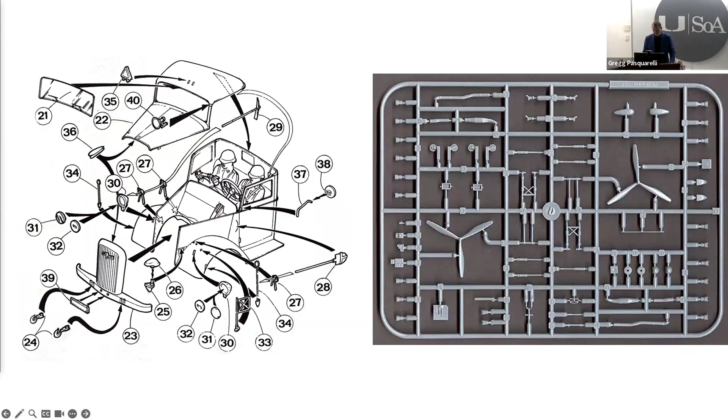And so from the very beginning of our office, we really started to look outside of architecture, mostly to aerospace and to the automotive industry, to think about the way that those drawings are made, those models are made, those pieces are put together and then assembled somewhere in the world. Maybe they're made all over the world and then brought together at one place. And by mastering that, we were able to push the limits of what you could do architecturally and make different kinds of translations and extract every dollar out to make better citizens of the buildings and the places that we make.

And this goes all the way back to, scarily, almost 25 years ago when we won PS1's Young Architects program, and created a kind of urban beach, which was a sculpture. And this was the construction document set, which was a series of large scale templated drawings where you just lined the wood up based on a color coded sequence and put it together in order to create this object that then sat in the courtyard of PS1, which is part of the Museum of Modern Art.

And it was the first time when we brought together this notion of structure, surface, and program into a single element, where the walls became the chairs, became the benches, became the structure, became the chambers, and created this object that was very easy to put together, and really drove this whole program for the museum.

But as we continued to do projects like that, we really got deeper into the making of things and how do we draw them. Because architects are very good at taking all of these different problems and synthesizing them into a spatial solution. And then we have to dumb it down into 2D information and give it to other people to both make the parts and to put the parts together. And that reinvention into not only 3D, but 4D and 5D is where a lot of things are lost. And so we continue to look at outside ways of transmitting this information in order to build buildings.

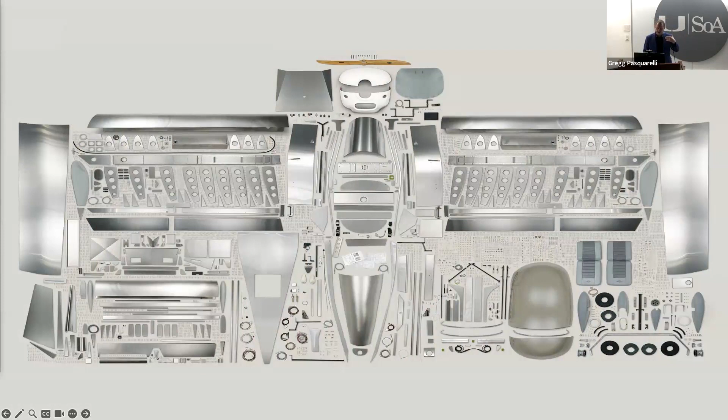And the first time we were able to do that was a small park we did out on the eastern end of Long Island in a town called Greenport. There was a folly that the mayor wanted of a camera obscura. And so we asked them if we could take that opportunity to make the first building that was completely digitally fabricated. So it was 2,200 parts, no two were alike. Every single one was fabricated with CNC equipment. It was delivered to the site and it was put together.

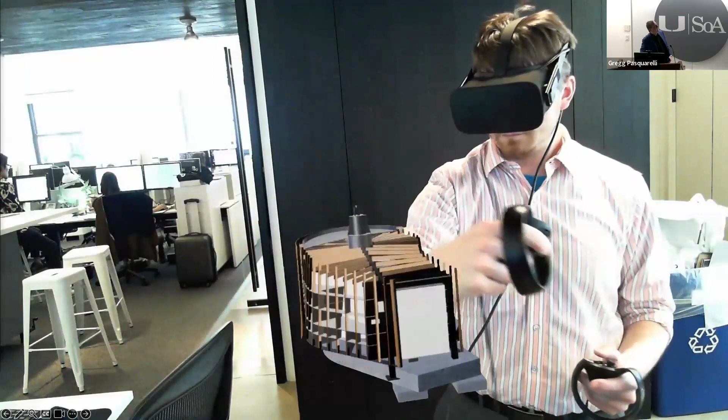And the most interesting part about that was that these were the drawings that made the building. They were either drawings that told you how to make each one of the parts, or drawings that just showed you how to put the pieces together. And this is every part that went into making the building. We were using a lot of early cutting edge technology, visualizing and thinking about how the pieces would go together. Every part was pre-numbered, pre-drilled, pre-slotted, and went to the site. And we created this little pavilion, which still stands today in this park.

And it was a really telling thing for us because we were able, at a very strict budget, to produce a piece of architecture that was able to use better materials. We were able to control where the materials came from. We could think about the supply chain, about the labor practices, and we could make everything customizable, but it was mass customizable, which was a more effective way of delivering things like that.

And very soon after that, we did our first development project. Because no one had ever used CNC equipment to make a facade before, to get a building where someone would allow us to test these ideas out, we had to joint venture with our client to become the developer ourselves, because then the client said, well, you have at least as much at risk as I do. And if you want to try these crazy ideas, you're going to get hurt if you screw it up.

And so it was by taking on that territory of risk and finance and figuring out the project that we were able to push the limits of what we could do from an architectural perspective. And so it was basically a historic building. We put a contemporary top on.

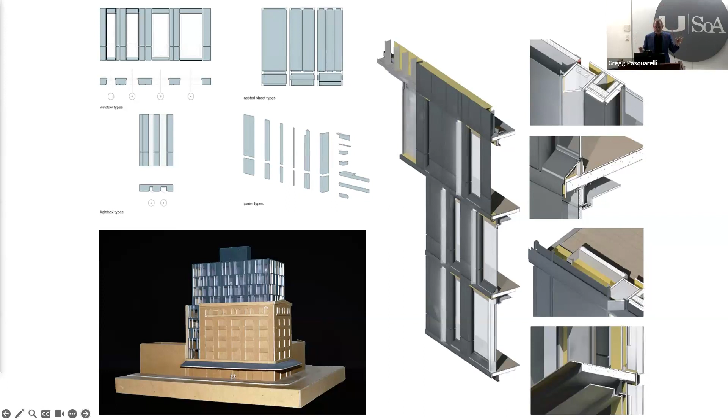We made 22 sort of protoforms of a zinc paneling system. It was 4,000 pieces in total. It went directly from a 3D model to the plasma cutters. The 4,000 parts were made. Every part came and it explained where it would be delivered. And then there was a code system that was laser cut right into the part, which explained to you where to put the piece. So the architectural detailing of the building itself was the instruction set for putting it together.

And so this was the building when it was finished. This is the first fully digitally fabricated facade in the United States. And we brought it to market and it did really well and it helped the whole neighborhood and it really pushed a lot of things that happened in this part of the city.

Now, interestingly, this was finished in 2003, and in 2006, the building across the street was taken by a small little search engine firm at the time called Google. And Larry and Sergey's offices actually looked out on this building. And so they liked the building so much that they called us one day and they had us come in, and we've been working with Google for 18 years now doing projects, but it was just because they understood what was going on from a technological standpoint that they then invited us in to begin to think about how to plan and work and do work on their campus.

That said, this was a 50,000 square foot building, which is not terribly big, although we really learned a tremendous amount about it. As we said, we were development partners on it. The project was a success. All the projects that we've been development partners on have not been successes, but this one was. And we took whatever revenue that we generated from this to help build the practice and to really reinvest in the research in order to push architecture forward.

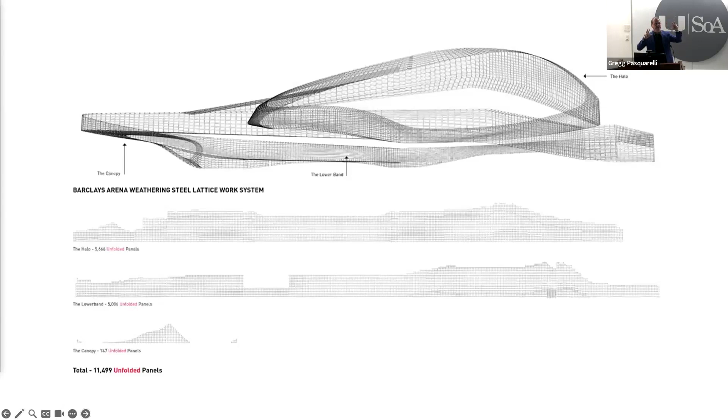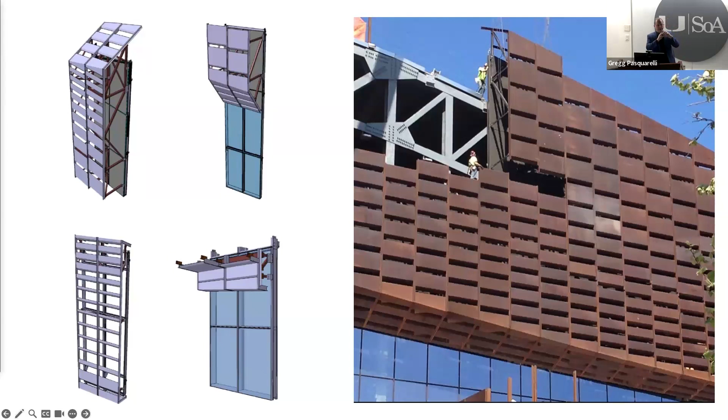And eventually it became these 2 wrapping bands of, I think it's 11,500 different panels of Corten steel. And we redesigned the building into 920 mega panels that were exactly the size of what you could put on a truck and get into New York City without a special permit. So we reverse engineered the entire project.

We actually created a joint venture with the facade manufacturer. We built a warehouse and collected rainwater. We produced all the fabrication tickets. We hung the panels on a dry cleaner rack that went through 15 wet dry cycles a day for 4 months and put 10 years of the rusted patina on those pieces.

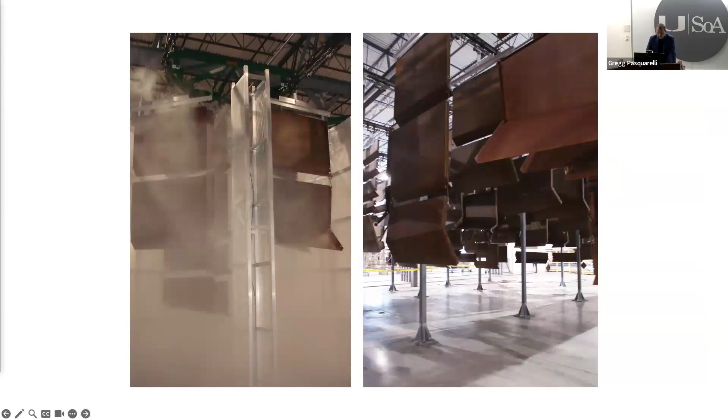We wrote our own iPhone app to be able to track and manage the construction of all of these things. And here you can see going through the wet dry cycles. And the 921 panels came together and clipped in perfectly and were able to fit, and we got the building done on time.

Now, the only reason they let us do that was because they looked at that little porterhouse building at 50,000 feet, and we had never done anything more than 50,000 feet. Now this is a $1 billion project. But they said that they were shocked that we, one, took a financial position in the development of the building, that we took the risk of using these new technologies to make a new kind of facade system, and that we were completely at risk for doing that and solved the problems. And that gave them the trust to let us then do it on the $1 billion project.

So this is the Barclays Center, what it looked like when it was completed. The interior, at the time, most arenas were really sort of like very colorful. They kind of looked like shopping malls or like airports. And we love sports. So we sort of wanted to make it feel like a black box theater, have it really, really dark. We use special lighting to make the court really float and be dramatic.

But maybe my favorite thing that I've accomplished as an architect in 25 years was I got the New Jersey Nets to change their colors from red, white, and blue to black and white. I told them, if you want New Yorkers to wear this, it's got to be black. So I said, all the seats need to be black. We have to use black concrete. We have to paint the ceiling black. And we have to really make it feel like this black box theater.

And for 2 years, they kind of just nodded at me and thought I was crazy. And then I was in a meeting where they said, this ceiling's painted gray, the change order to paint the ceiling black is $2 million. Do we really need to do this? And at the time, Jay-Z was a part owner of the Nets, and he was sitting next to me, and I said, yeah, we got to paint it black because it's got to match the uniforms.

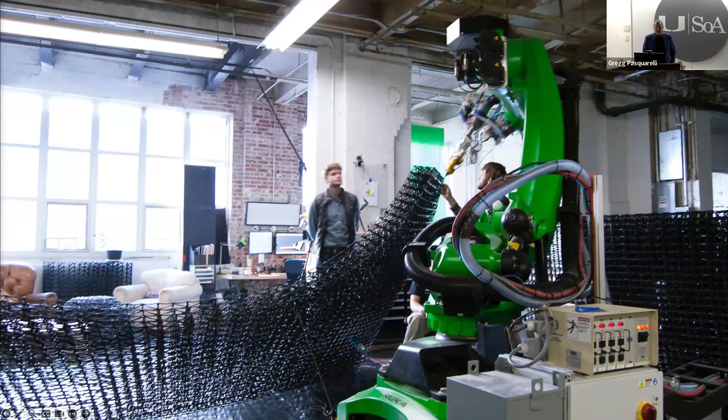But we continue to always look at the research, whether it was 3-dimensional printing, or taking bamboo in order to create molds for concrete or furniture or pieces. And then we did this for Art Basel and Design Miami, I think in 2016, which at the time was the largest 3D printed object, which was the entry pavilion. And then we continue to research different kinds of ideas and different materiality.

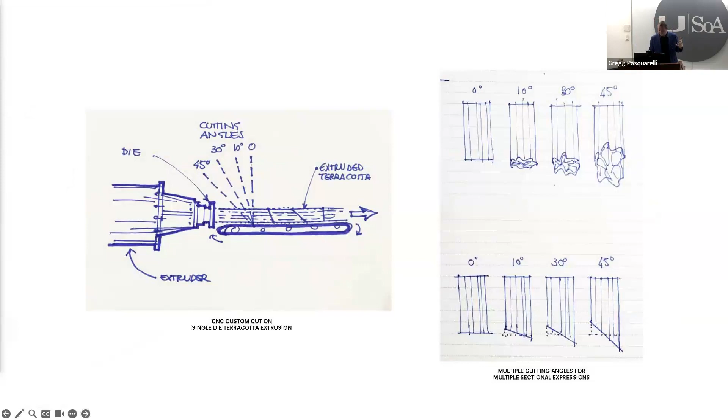So this was looking at how to take something like a traditional material like terracotta and extruding the clay through digital equipment in order to see what we could do with this traditional material to reposition it into something else. So here you could see some of the test pieces we made.

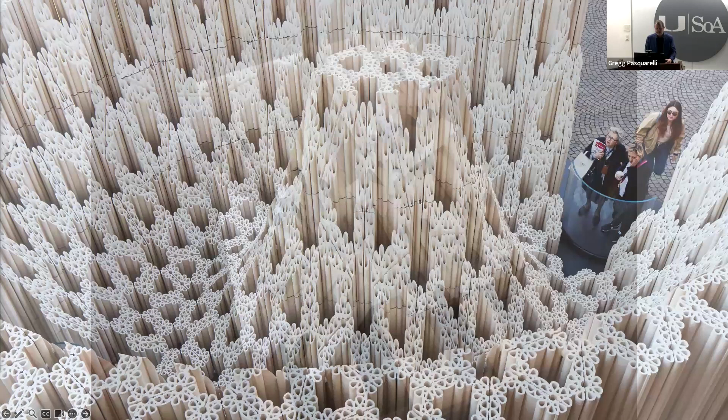And then we were invited by the Milan Furniture Fair to do a pavilion outside of that, and we created this object, again, using digitally fabricated, extruded terracotta. And it all comes apart and then it goes together. And it's called Wave Cave because one year it looks like a wave and you can enter it like this. And then the next year you flip it over and it's a cave. And so wherever you install it, you can do it either way.

And so that was a really kind of fantastic research project that then pushed us into this material that's a very traditional material, terracotta, that people wouldn't think, but really by using digital fabrication and research and these ideas, what could we do to bring this material back? Because it really has a kind of fantastic texture, and we think is doing some kind of great things for the cities where we're putting some of the buildings.

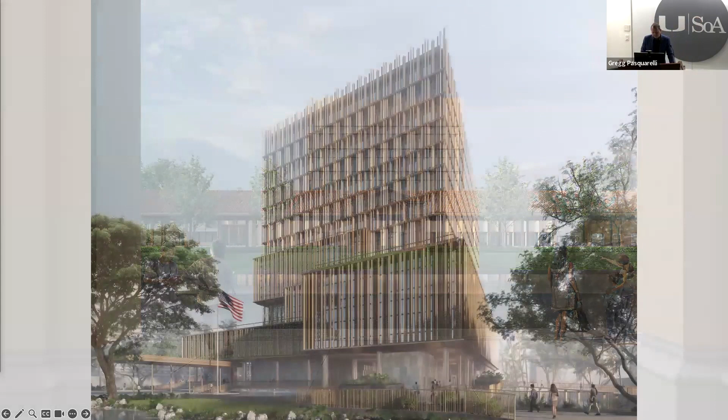And so that eventually led to us winning the Milan consulate for the State Department. So this is now under construction in Milan, reusing a historic police station, keeping all the original pieces and then creating the new building in the middle, inviting people in, even though there has to be a lot of security, but there's an art gallery and there's a cafe, and it makes people feel very welcome and it doesn't feel like a fortress. And the Wave Cave is actually going to go permanently in the gardens of the US consulate in Milan.

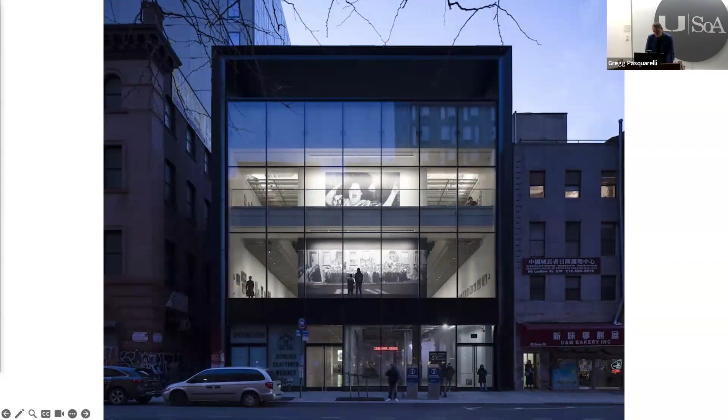And that's led us to other projects, like this is the new embassy in Bangkok that's under construction. This is a university building in Vietnam that we're in the planning of. Other buildings, this is the new International Center of Photography on the Lower East Side. So the building is either closed or completely opens up to the street. To our competition, the worst second place we ever got, which was for the Obama Library in Chicago. That was a tough one.

But to buildings in Australia, a new tower in Rotterdam. This is a new building in Miami in Brickell that is under construction right now. This is in the Republic of Georgia, two 95-story buildings that are being built on the waterfront there. Fascinating clients who are both Russian and Ukrainian, working together, trying to build this up, and they know that there'll be a future past this war, and they're thinking about what's next.

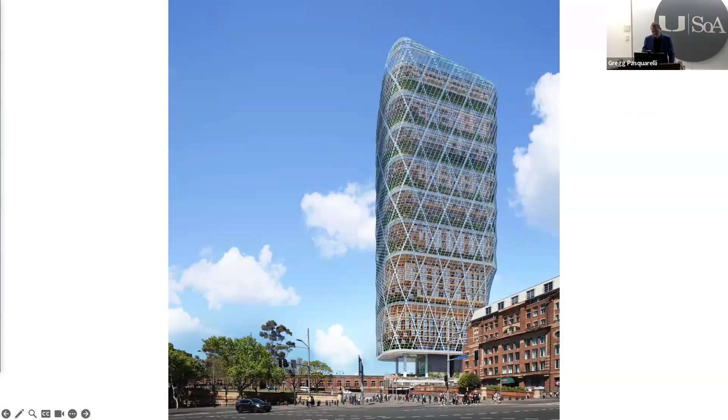This is a brand new research and innovation lab for Volvo in Sweden, literally just announced last week. And then a super interesting building that is under construction right now in Sydney, Australia. So this is for the tech company Atlassian. And before the pandemic, they were 70% remote to begin with. But they really understood how their company worked, and it was really about creating neighborhoods.

And so they had a really tough site, but they wanted to make the most sustainable building they possibly could as a tower. But as you know, steel and concrete have heavy carbon footprints, and timber is really much better, but you can't build timber that tall. So this is a hybrid building where every fifth floor is a super floor of steel and concrete, and then a 5-story timber building is built on that floor, and it's in a park. So on the super floor, it's deep, so it has enough soil so that you can fully plant it, and then a 5-story timber building, then another super floor, 5-story timber building, another super floor, and you could see it go up from there.

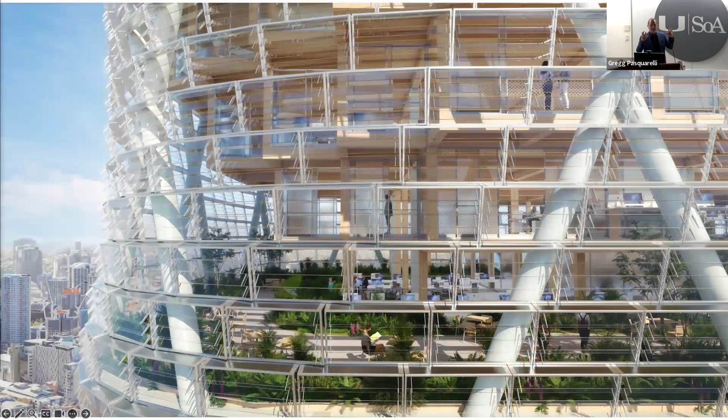And the entire facade is jalousie windows that automatically open and close, so that it responds to the wind direction, the temperature, the humidity, and keeps the park alive and a really great place to be. And then you work in the timber building inside the park, which breaks down the skyscraper into much smaller neighborhoods. And people can then sort of get to know each other and work by groups and have these smaller scale, more intimate places, even though they're in a 45-story building.

So super tough because there's a train station on the left and there's a historic market hall on the right. So the whole building has to come down onto a very small core in the middle and cantilevers off of that. And then the X bracing is what gives it its rigidity, keeping it from torquing, so that the jalousie windows will work. This is under construction right now and should be finished in about 2 years.

If Alberti says that math is the place where art and science come together, I've always said that those three things create design, but that really there are all these other things you have to deal with as architects. Whether it's the politics or the finance or the theory or social responsibility or these kinds of technologies that we've been showing you that can help push it forward, it's not just the aesthetics.

It's really getting involved in all of these other elements. And it's only when you filter design through those things that you get to architecture. Architecture has to take into account all of these other issues. Sometimes in school, they're like, you don't need to know about finance. You don't need to know about business. I think in the last few years, the social responsibility issues have really come to the forefront. And I think that's fantastic.

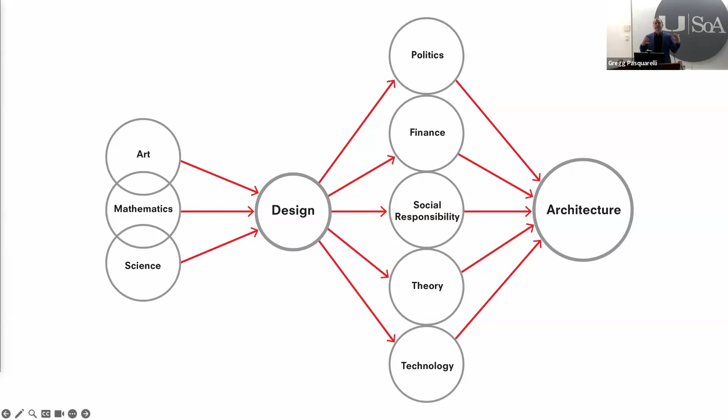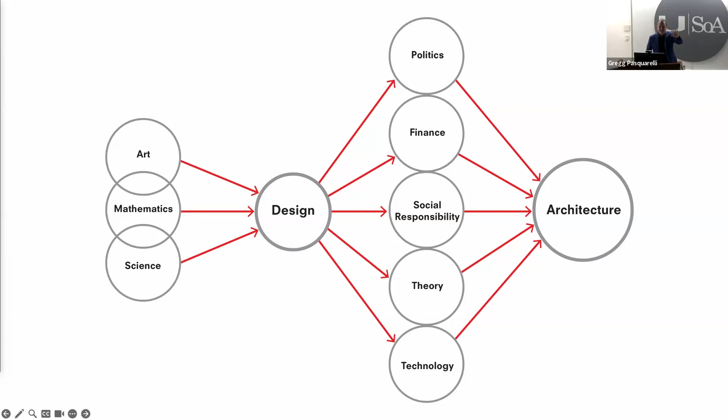So it's really important to make a healthy practice to really think about all these things that we think of as outside architecture, but they absolutely are not. They are critical to know and understand. And don't get so nervous about knowing about finance. It's really like 60 vocabulary words and knowing Excel pretty well. It's not that hard, but you've got to at least engage in it.

So I'm going to show 6 projects very quickly where we tried to take all these things and bring them together. So thinking about meaning through context. The first project is called the Brooklyn Tower. It's in downtown Brooklyn, on a triangular site, which is very unusual for New York. It has this beautiful historic bank on part of the site that we had to build around. It had been really badly managed by JP Morgan Chase. It was falling apart. So we committed to completely restoring it and opening it up to the public.

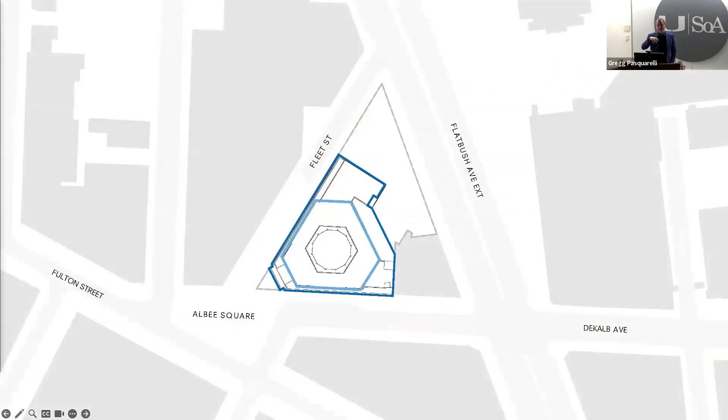The original architects used hexagons and 6-sided stars to deal with that triangular geometry of the building. The dark blue line is the landmark, and the light blue line is the interior landmark. The rest of the site, in that very odd shape to the upper right, was where we could build a big slab tower as of right. But we went to the city and said, if you let us demolish part of the landmark, we can build a much better building for the future.

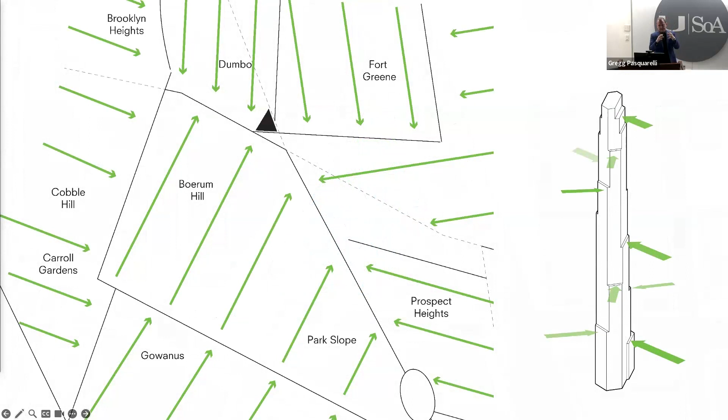So the argument was to take that triangulation and bring it across the site, and build a tower that was a series of interlocking hexagons. In Manhattan, you have the primary grid of the avenues and the secondary grid of the streets. But in Brooklyn, all the grids are different. Because this would be the tallest building in Brooklyn, the only site zoned for this kind of height, we wanted you to always feel like you were looking at the front of the building. The hexagon shapes really helped us blur that idea.

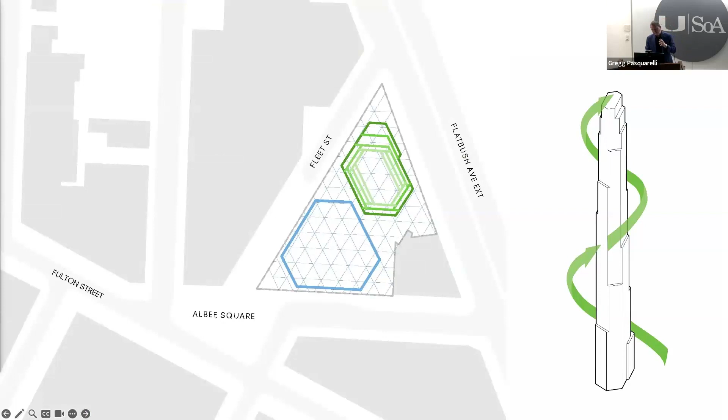Then we created a spiral with the setbacks as it went up. And we started to think about fluting: what's fluting in nature? What is it in classical architecture? What would a contemporary idea of fluting be? We wanted something very somber, a color range from very dark, strong black stainless steel up through brasses and bronze, to even a white ceramic. If we could create these fluted elements taken from the historic parts of the bank and create this texture on the hexagon, it would really change the way you perceive the building.

So we literally made, I don't know, about 2,000 different shapes from the bank, and different colors and different sizes and different scales. And we made these boxes, and we just made compositions of all the pieces coming together, and took light and photographed it so we would see what the sun would look like as it passed over this materiality. And it created this facade with these different textures on the building.

And then we sort of mocked it up in a model here, and you could start to see what it would be like. And we were working on the interiors and taking the interior and bringing it up and moving the pilasters around to sort of catch the interior walls of the building. But I think the most important thing was that even though it's a residential building that also has 30% affordable housing in it, it has to have glass. But what we did not want was a large glassy building.

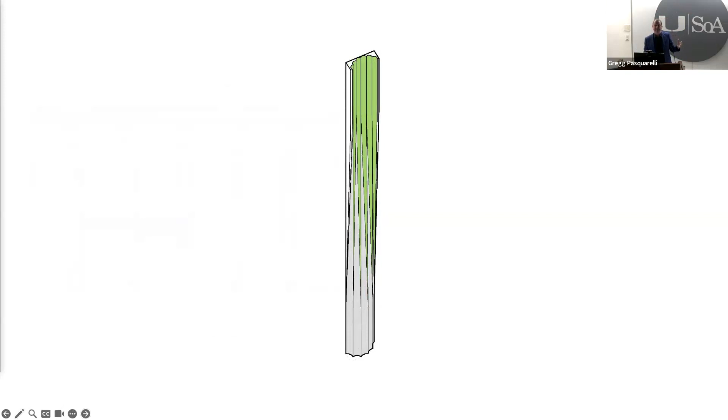And so there were a lot of both convex and concave fluted columns on the site. So we said, well, what if we took convex at the top and concave at the bottom, and we lofted those two things together and created what we're calling the convexicave, which brings the two together as these 5-story pilasters. And what if we would CNC mill them out of solid marble? And what would that be? So this was the idea of what the new base would be with the convexicave pilasters.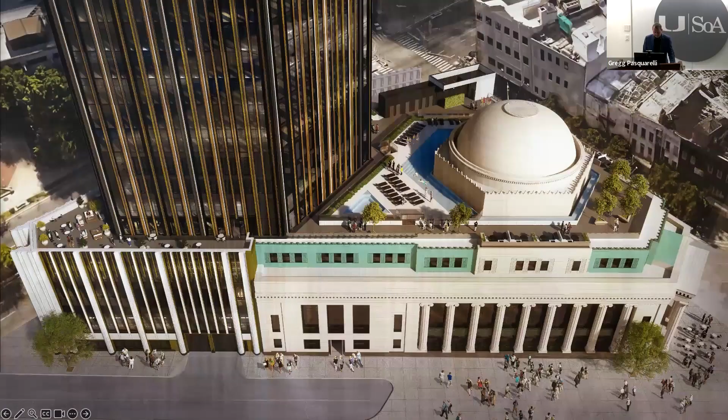And then the other idea was to take the roof of the historic bank and turn that into the amenity spaces. So we put the pool around the dome of the historic building, so that when you're swimming in the pool, the historic dome comes up out of the water. And then created the bottom 2 floors of the tower coming in as the amenity spaces that connect to the outdoor space. So here you can see the pool and the dome. And then the model of the building with the white base and the black tower.

And then we used AR to bring this to the city. This is almost 10 years ago, so that they could see what the building would be like on site, how it would fit in as a neighbor, and how they could understand what the building was going to be. And so even though we were demolishing part of a historic building, they totally understood all of this, and they loved the convexicave columns, for which they gave us permission. And we even had unanimous approval from the community board, which never happens in New York, for sure.

So here you can see the building as it started to go up. Here were the first installation of the facade panels. You could see the sort of almost Brunelleschian kind of poché as it turns the corners.

And then the different colors and materials, and because of the shapes, when the sun passes this, the building really is quite dynamic. Sometimes it looks very dark, and sometimes it's super bright and brassy and almost even orange, glowing with the sun. Here you can see, when you're looking on the oblique, it looks like a completely different building than when you're looking at it from the frontal position.

And here you can see it as it's nearing completion. We're getting very close to finishing it. The first residents have moved in the bottom half of the building, but the top half of the building is still under construction. And there you can see it relative to Lower Manhattan.

And then the last part, of course, because they were hard to do, the convexicave columns are the last pieces going in. But here you can see them digitally milled, 5-axis milled out of solid marble as they're clipping on the base. And here you can see it turning the corner. And you can really see the texture and the shadow and this kind of crazy play of classical architecture and modern architecture simultaneously. And there you can see the building at night.

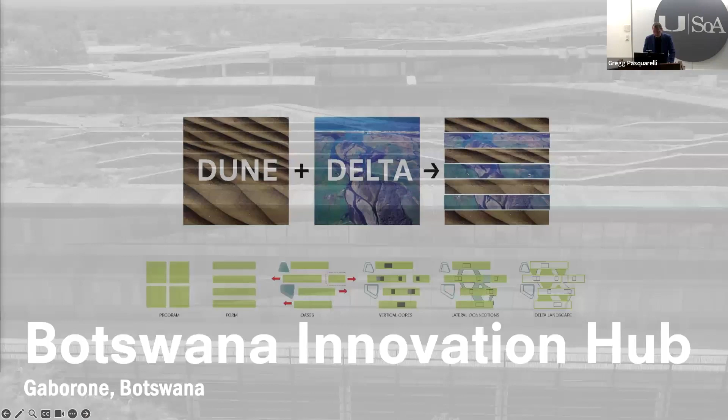Oftentimes we think about connections and about how do you work internationally. So we won a competition to do an innovation hub in Botswana, in Gaborone, the capital. And the two main features in Botswana are the dunes and the deltas. And so the idea was to sort of slice those onto the site to have both dunes and deltas. And there were these incredible existing trees.

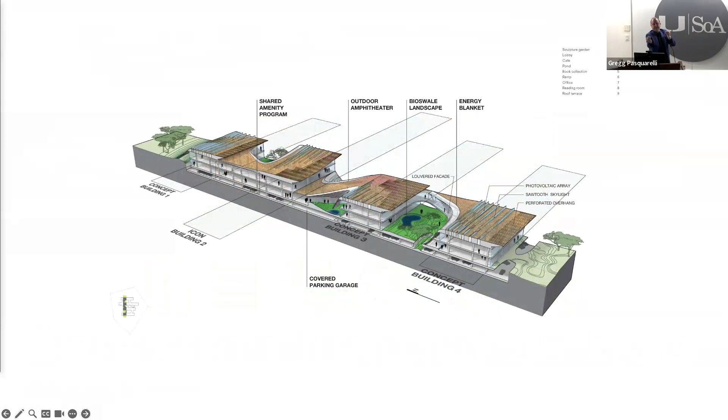And on the site we wanted to maintain them, so instead of digging out to make a basement, you have to cover your cars in Botswana. It's too hot. They can't be parked outside. So they build shade structures or they put them in basements usually. But we said, let's just build the parking on grade and let's berm the land up and let's leave the fantastic trees in place and build the building around the trees. And those would be the deltas, if you will.

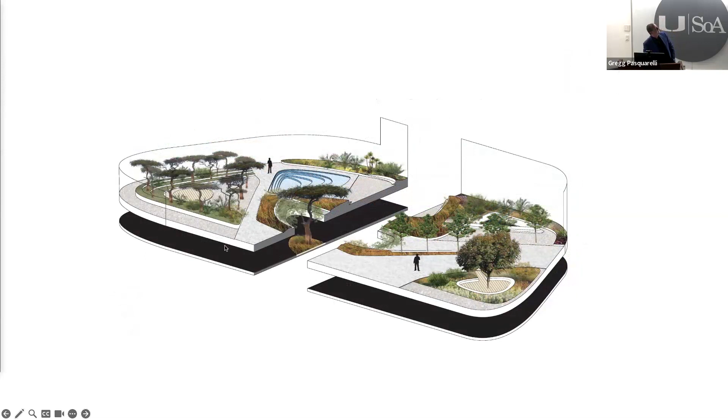So there you can see that the tree stays in place. That's the parking underground. And then there's a new grade level that becomes these courtyards. And so this was the original image from the competition. And then we studied lots of different pattern making and basket weaving and other ways that people are using raw materials. We planted trees on the site while it was being built so that they could then be harvested and used on the interior walls of the building.

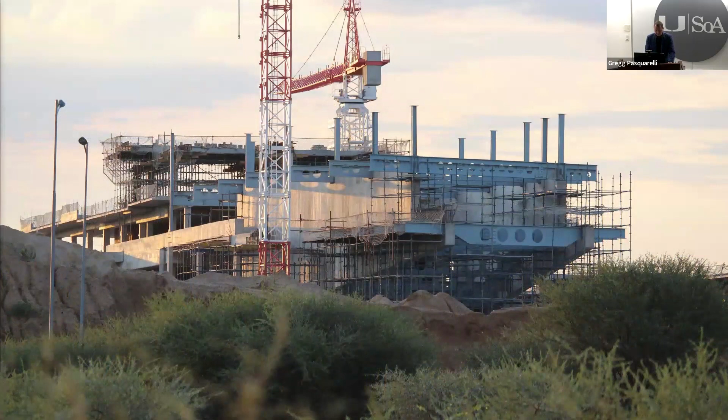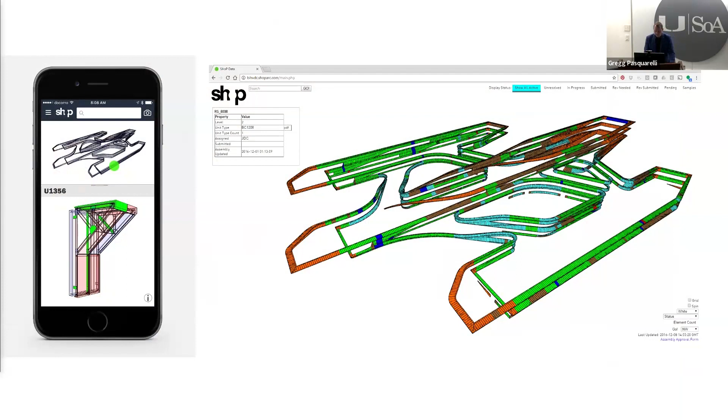And here was the building as it floats above the grasslands, and also with the largest green roof in Africa. So here you can see the building under construction. They had some of the interior spaces, but it was really about modeling. We brought laser cutters down to Botswana. We went into the schools and trained the students in how to use them, and then they ended up helping us build the building and helping us design and get the fabrication tickets made, but then even working with the contractors to put it together.

So, for a lot of our buildings, we really model at a high level. So this is what we call the turntable, where we keep the active projects. But if you clicked on Botswana, you would see the level at which we model everything, because we break apart the building and send it to competitively bid the parts separately, but they're made like the best piece of IKEA furniture you could ever think of, that the parts just come back and we put it together. So, this is the level of detail that we go down to.

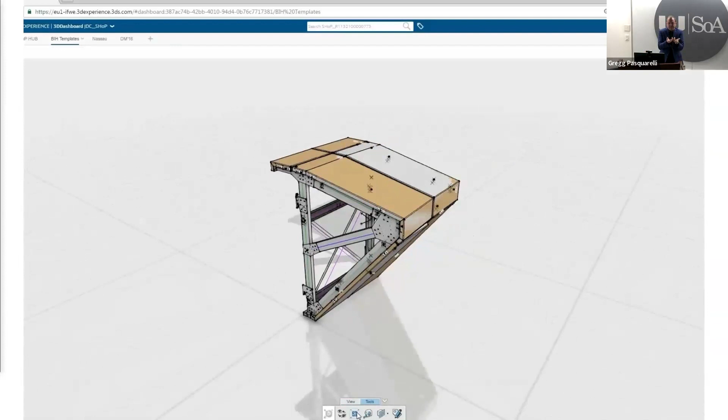So a fabricator doesn't know that they're making these parts for a skyscraper or car pipe assembly or whatever it might be. But we manage all this information, and therefore we can make any part completely. So it's all mass customization, where we can make any shape in any part, and it doesn't cost any more than just making a straight standardized part. And so this is the level of the detail that we do.

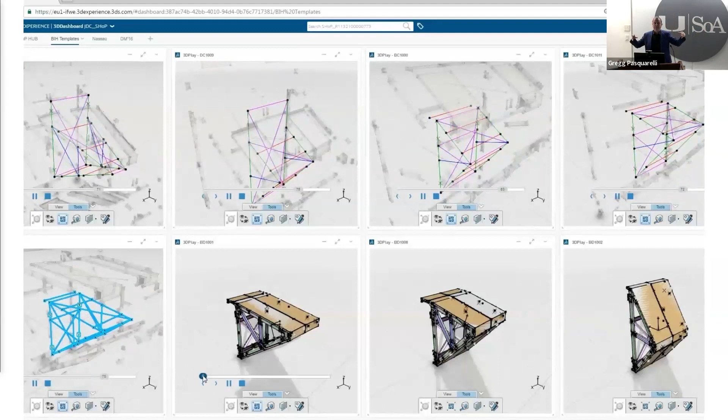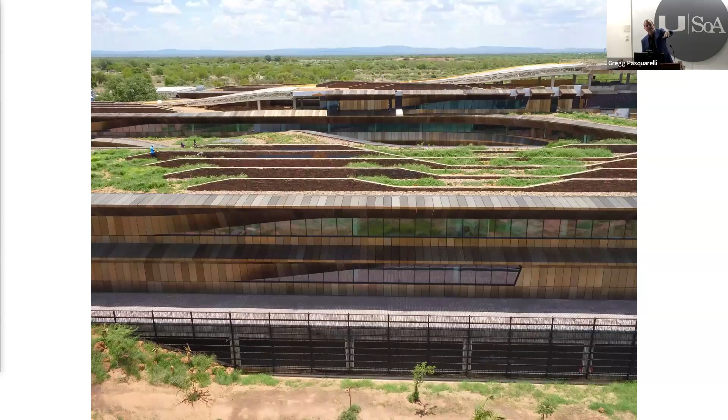And this is the building that they're starting all of the, it's a 400,000 square foot building, but a 4 million square foot campus eventually will be built there. But here you can see it as it got finished. So, I mean, the technology is great, but it's only in service of building good buildings and being efficient and taking care of them.

And I always say, photovoltaics are great, right? All this stuff is great, but the most sustainable thing you can do is build buildings that people love and they take care of them and they don't renovate them every 20 years. That's really the most sustainable thing that you can do.

And be efficient in your design, use materials smartly, use good quality materials that age and patina gracefully, and you don't have to repaint it, you don't have to refinish it. That's the intelligence that really will have an impact on our carbon footprint. That along with living densely near mass transit.

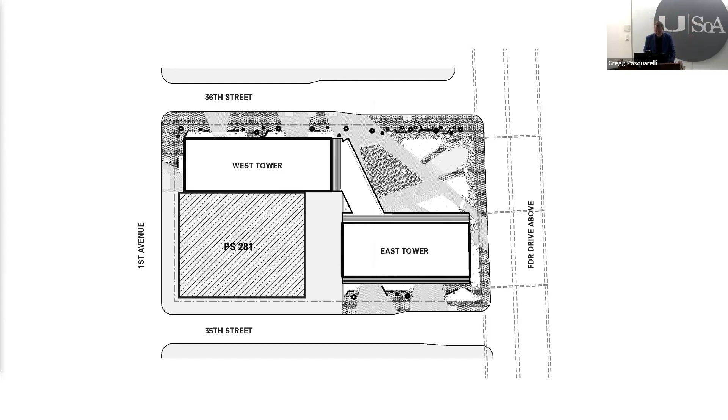But this was a master plan that was done about 15 years ago to put 2 towers. I won't say the firm that did it, but they put the school on the southwest corner and they put the park on the northeast corner just to make sure that the park would be in the shade for its entire existence. And then they said that we had the right to build these 2 towers in this very tight envelope.

So my client bought the site. This is JDS, Michael Stern, and said, this is pretty bad zoning. What could you do without having to rezone it, which is a very laborious process? So we said, look, let's look at that envelope and maybe we could just tweak the buildings so that it goes from one edge of the envelope to the other edge and back to the other one.

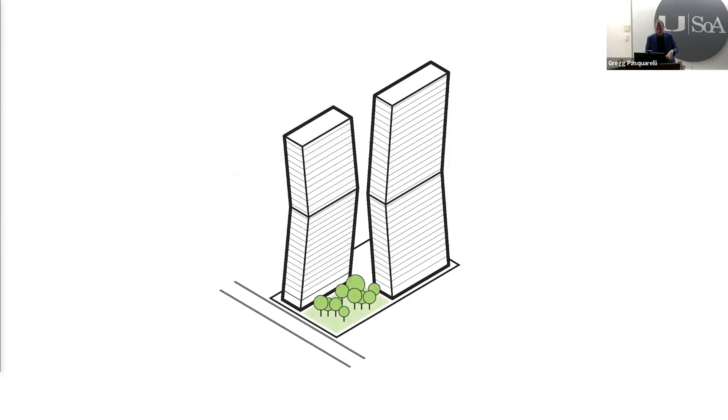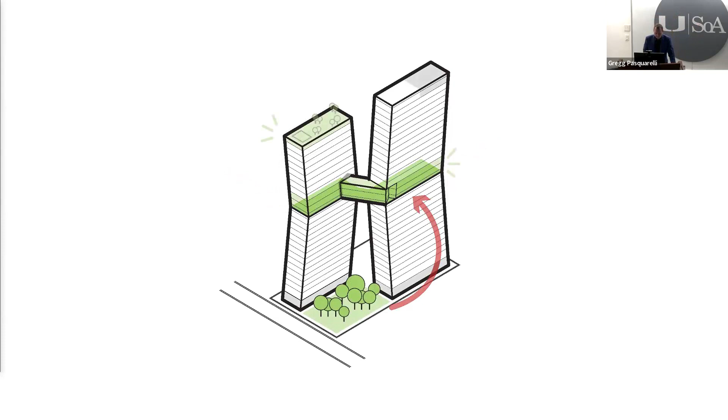And then let's take that park, but let's make almost a second park for the residents and connect it with the bridge so that the whole amenities becomes this kind of middle zone in the building. And then let's put all the mechanical on one side and use the bridge as like an extension cord to plug into the other building and therefore have an almost free, open roof on the top.

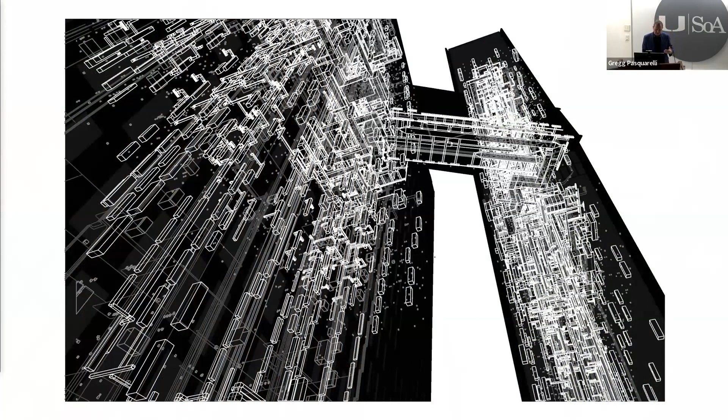And so then we said, on the north and south, let's put a solid material, and on the east and west where you have different views, it would be these thin glass elements connected by the bridge, and tilt these buildings 4.5 degrees in each way. So the only trick about that is really the mechanical systems. And so we spent a huge amount of time modeling all of the mechanical systems and the plumbing, and that was really the trick of getting that building to work.

So it's very standard apartments. Again, this building is also 20% affordable units. You could see as one building moves north-south, the other building moves east-west, and then they're connected by the bridge in the middle. And then we skinned them in raw copper.

So they came like a shiny brand new penny, and then they will patina over time, and they will eventually turn Statue of Liberty green. Right now, they're sort of chocolatey brown, kind of the way you think of a penny in circulation. Nobody knows how long it's going to take to get to Statue of Liberty green. We've asked every expert and everyone's told us anywhere between 15 and 50 years.

So I'm trying to eat better because I want to live long enough to see them green. They're maybe about 6 or 7 years old, and there's just a hint of a little bit of green now, but I don't know how long it's going to take. But if I'm long gone, go take a picture of it and remember this lecture. So here you can see the buildings as they got built.

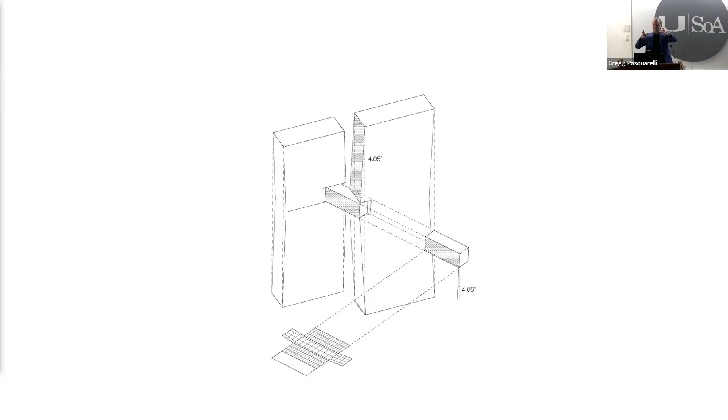And then looking from the west towards the east on the river. And then the trickiest thing was building the bridge, because every part that the bridge is going into is leaning. So it's literally a shifted parallelogram in 2 dimensions to create the bridge. And then we said, well, what program should go on the bridge? And it was, again, very difficult to draw, very difficult to get the structure.

There hadn't been a bridge built in New York in almost 80 years. And how to put that whole thing together, all racking in different angles. But then, you know, we got it together. You can see how it fits into the 2 sloping buildings on either side. And then we said, well, look, if we're going to put a program on the bridge, why don't we put the swimming pool so that you could swim from one skyscraper to the other, back and forth.

And actually the funniest thing was the hardest thing to get approved in this project was the tile pattern on the pool bottom, because there's one guy in New York that approves all swimming pools, and he only likes turquoise colored pools with thick black lines. And I think that was a 4-year argument to get that approved, but we did.

And then this is on the 3rd level of the bridge, this is the lounge space. We actually have Kristen and Avaji here from Woods Bagot, who was the interior designer on all of this building. Here you can see the lobby, the copper panels as the building folds.

And also it's in a floodplain, so the whole thing is resilient in the way that it gathers flood water and how you can pump it out, and all the mechanical systems are up on the 2nd floor. There's enough generators, like if there's a blackout in New York because of a weather issue, if you have your phone and your refrigerator, you can kind of make it a week, no problem, right? What'd you say? Exactly. We designed this right after Sandy,

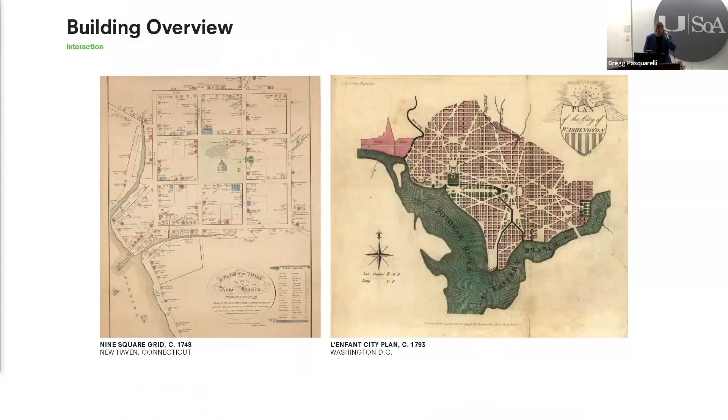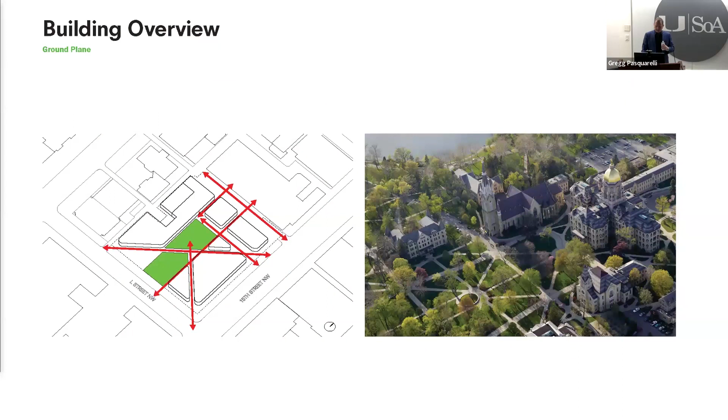So this was the old Washington Post headquarters, a brutalist 60s building. It's right between 3 subway stops, and literally no one ever went here because it was so off-putting. So we said, what if we rethought the way a Washington block went? We looked at, well, New Haven is the first planned town in the United States, but we looked at L'Enfant's plan with all the angles and the cuts, and we thought about them relative to the quad on a college campus. And if we were in this building that was in the center, what if we lifted the building up and allowed a quad to happen on the private property, invite the public in to cross and move through it?

And this had never been done in Washington. And so the floor plan then became this whole series of 9 different restaurants. And the idea was to have it run by one operator that would be everything from a taco stand to a 3-star Michelin restaurant. So everywhere you could go, and then a bar up at the end of the courtyard. And there you could see the plan looking down.

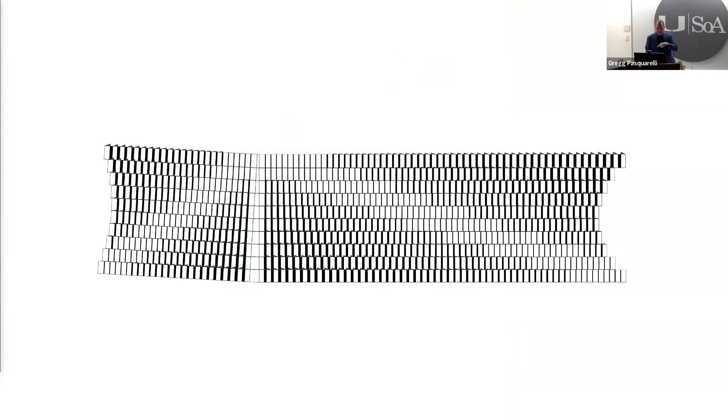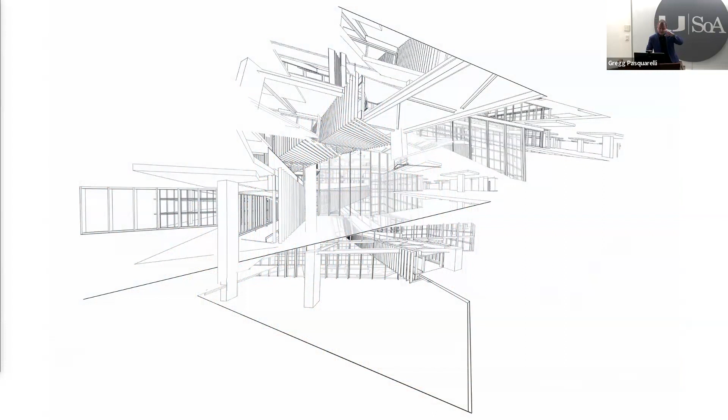And then these were some of the exploratory drawings that we were doing about connecting those parts. Here you can see walking on the grade. We collect the rainwater in this area here. And then basically the client loved the building, but they said it's such a long walk to go around the U. Could you short circuit the U?

And so the idea was that a 3-story atrium connects to a bridge that connects to a 3-story atrium that connects to a bridge that connects to a 3-story atrium that goes up. And then the bridges, you could walk inside the bridge or you could walk on top of the bridge. So there's actually 6 connection points between the 2. And that creates these bridges as you look in the courtyard.

And you could see the building raised up with all the F&B down below, and that you're invited into the site. And then this is looking sort of across at the offices. Fannie Mae took 800,000 feet of the million square feet, and the CEO of Fannie Mae said, make me the nicest building that you can that I don't have to testify in front of Congress why I'm in this building. That's so good. So, but they love it.

So here you can see the sort of cut throughs down at the grade, the plantings, the lobby, and the bridges. So we were doing this building around the same time we were working on another building, which was for Uber's headquarters. And it was also two buildings. And we also came up with the same idea of double-decker bridges to connect the two. And the teams in the office got into a giant fight over which team came up with it first. And so here you can see Uber's headquarters.

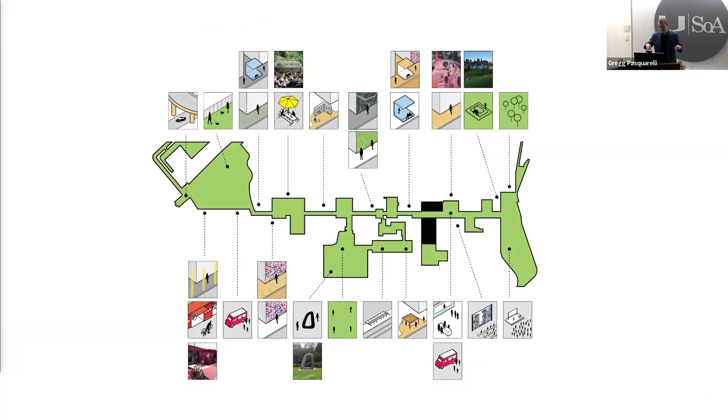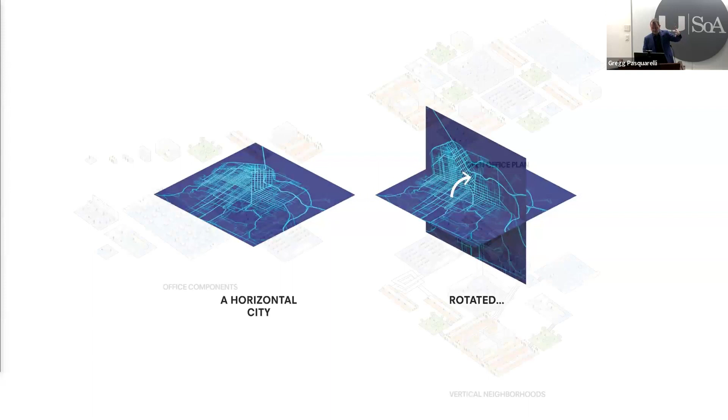But Uber was a super interesting project down in Mission Bay near the new Warriors Arena. So there's this huge park system, so it was about linking into the park. We were thinking about the verticality of San Francisco versus the horizontality of Washington. And so we said, well, what if you just flip the street grid vertically? And what if instead of taking the typical office components that are just laid out on a floor, we start moving them vertically and horizontally to open up space?

And the CEO of Uber had a really smart idea. He wanted to make it so that you put the elevators in the back and make all the spaces where people come together linked in the front of the building and all connected by staircases. So it'd actually be inconvenient to take the elevator, but super convenient to walk up and down the stairs.

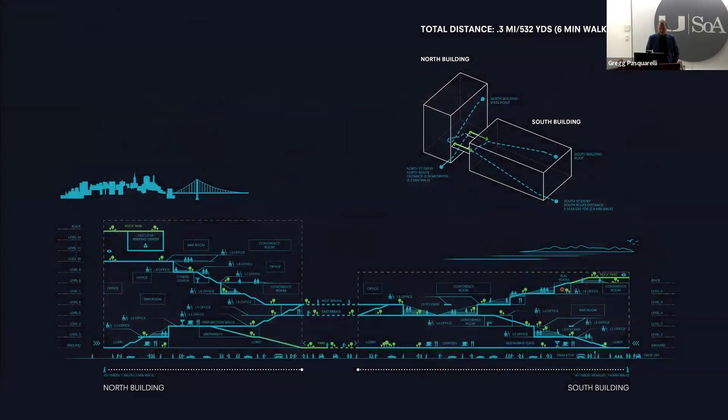He really was into this idea of walking and talking and solving problems, and all the conference rooms and all the meeting centers and all the collaboration centers and all the food are on these paths, and the elevators are behind. And so the choice was what was the way to connect the most places in the shortest amount of time, and that drove it.

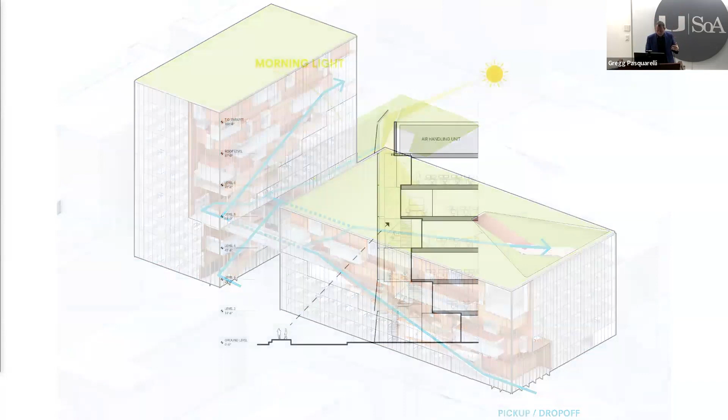So you see in the two volumes of the building, these are what we call the front porch space, and the white boxes are all the meeting rooms, and they're cantilevered into this space. And then the idea was to make it a kind of breathing building, so that none of that space was air conditioned and had a second facade that opened and closed to make it natural space. And then we created these microclimates by embedding plantings into the facade itself.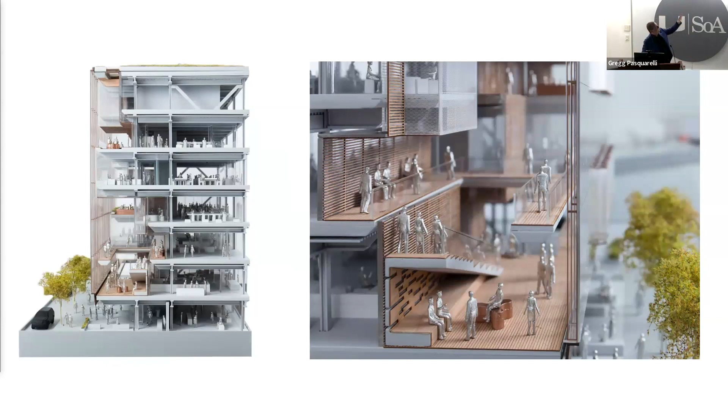And so this probably explains it the most. If you look on the left, the front third of the building is not air conditioned or heated. So it was a huge savings on what the building would use from an energy perspective. And then the back 2/3 are where all the programming is, and that has to be air conditioned to allow the computers and everything to run. Fascinatingly, people love working in the unair conditioned space, not the air conditioned space.

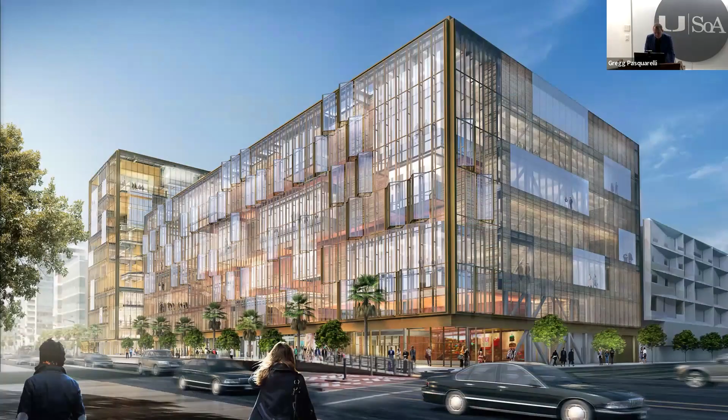So here were some of the renderings. And then the idea was that the entire facade would be made up of bifold doors, 16 feet tall, made in bronze, and they're on worm drives, and there's sensors all over the building. And so it can read where the wind's coming from, the temperature, the humidity, and the building automatically responds to its environment. So this was the rendering of the building. Here it is under construction.

Here it is when it's a chilly day and it's all closed. And then as it warms up during the day, the building begins to open up and breathe. And the rendering, all the collaboration spaces.

And so what's cool about it is when you look in the building, it's super, super low iron glass. So it's really transparent. You actually see everyone moving up and down inside the building. So the actual creative activity of being there becomes the kind of facade itself. And there you can see all the white boxes are the meeting rooms, and the doors opening and closing.

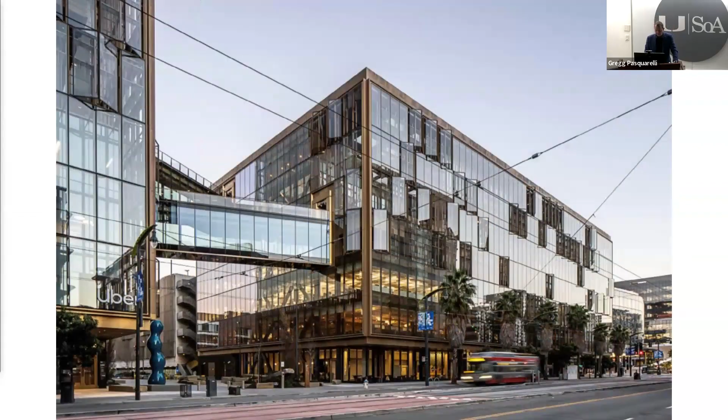And then it all ends up on a park on the roof looking at the water. And you can view up into that space from the sidewalk. And there are the bridges. We don't know which team came up with them first. And here you can see as they go across from building to building. And some of those interior spaces.

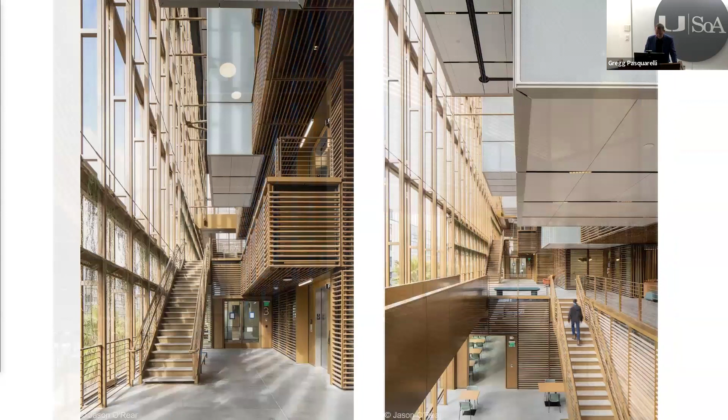And this is when it just finished. They're throwing furniture everywhere because people really want to work in that space, not at their desks. It's super interesting. Now, the fascinating thing was it's a total breathing building. And so it opened in 2022. And everyone said, this is the greatest response to COVID we could ever imagine, an actual breathing building. I was like, we designed it in 2015, but okay, sounds good.

But it actually is a really important thing, buildings that breathe and buildings that respond to the climate and buildings that really are attacking carbon footprint. And I'll finish with the very last project, which is 111 West 57th Street, which is one of the supertalls in New York. So a really challenging site, a really small site with a lot of FAR that we could put on the tower.

And we kind of thought of the history of New York, of a fabric of low rise and then a fabric of towers, and to think about that history. And we thought about the buildings that New Yorkers love, the Woolworth building on the left, which happens to be where SHoP's offices are, 1 Wall Street, 30 Rock. They have this kind of proportion, this kind of elegance,

mass, this texture. Now, these were all office buildings, and they were all built before air conditioning. So the floor plates had to be small so that you could open the windows and get a cross breeze in. And that's why they have this particular proportion. And it gives you a particular kind of skyline.

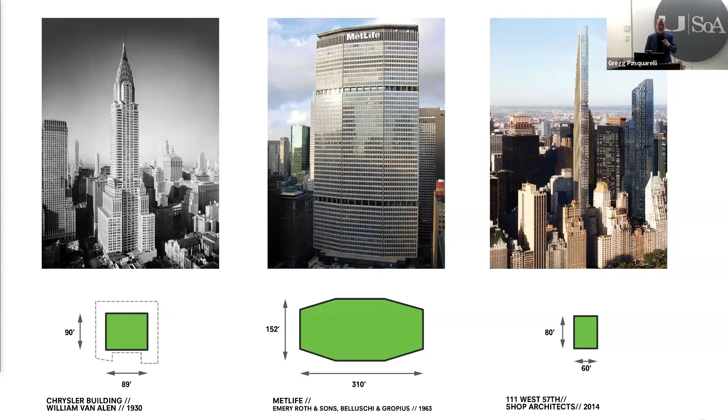So, people don't realize that the Chrysler Building is 90 by 90 feet in the tower. The typical post-war building is more like 300 by 150 feet. And this site was only big enough to put a 60 by 80 foot tower on the site. So it had, again, a landmark building. This was the Steinway Building, where Steinway pianos were sold for 100 years. Really beautiful building by Warren and Wetmore.

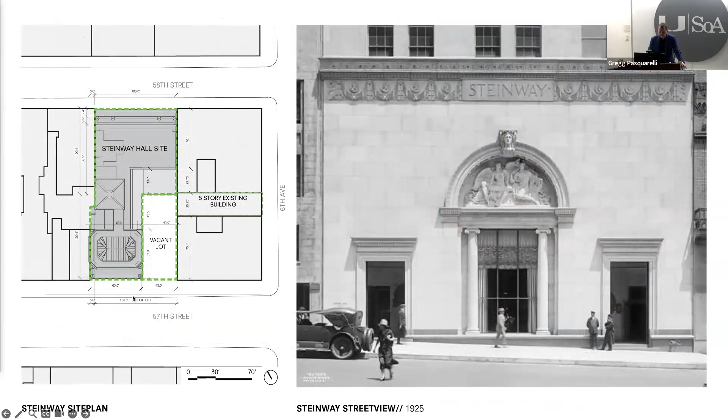And so my client bought this vacant lot and then bought the Steinway Building and then bought all the unbuilt air rights from all the other buildings and brought it on top. So we could have just built a building like this that would have obliterated the beautiful top of the Steinway Tower. But we went to the city again and we said, what if you let us build on the landmark, but we'll shift it back so it really celebrates this building.

We'll restore it, and then we'll put the tower up from behind on top of the landmark. And they agreed to do that. They thought it was a great idea. And so you basically have a retail podium, and then you've got a large amenity space that's basically vacant. And then the tower really starts above the historic building, if you will.

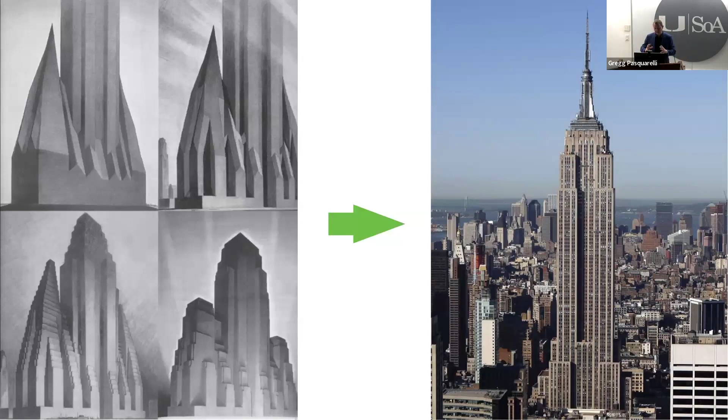And then we were thinking about the idea, we wanted a building that was very clearly from New York. We wanted a building that couldn't have been placed on or grabbed from Singapore or London or LA or anywhere. And so we thought about the setbacks on the skyscraper and the famous Hugh Ferriss drawings that you see on the left.

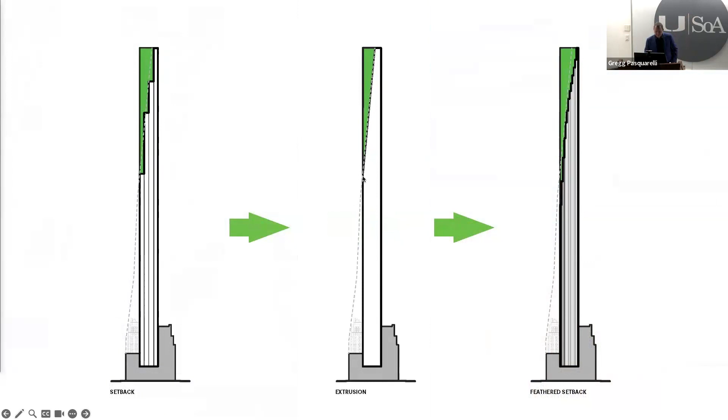And, you know, this is the sort of historic way that people did the setbacks. The contemporary way that most people are doing it now is just folding the glass along the sky exposure plane. Think of Hudson Yards and all the blue glass buildings that are there. And we said, is there a both-and solution? Could we do what we've been calling the feathered setback, where each pilaster, each smaller element that breaks down the facade of the building becomes a setback in itself that has the beauty of the arc, but also has the DNA of the past.

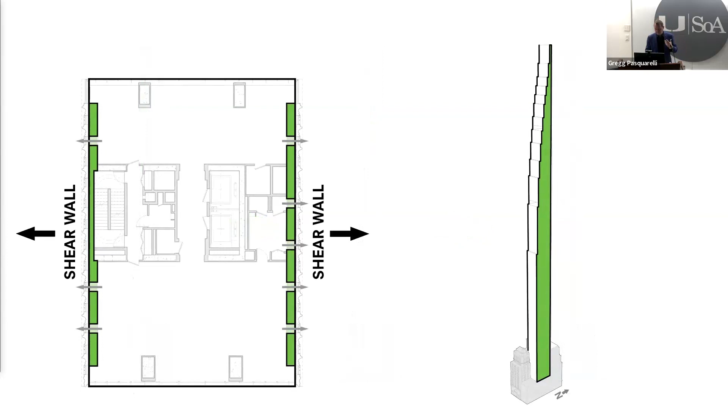And basically the building is an H in concrete. So it's two mega shear walls on the outside and then connected by a core in the middle. That wall typically would be a very blank wall because it's up against the neighbors and people don't put money into that. But we said, no, that actually should be the more spectacular part of the building. So we developed these pilasters and drew these flowing arcs.

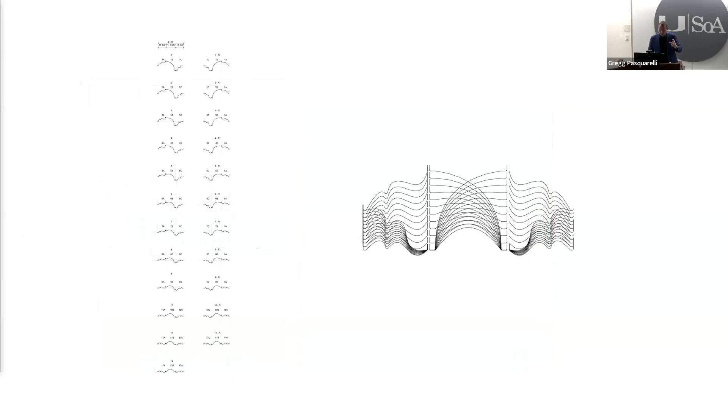And we said, what if each pilaster were this linear element that would shift back and forth as it went up, so that as the light hit it from the south, it would create this relief pattern or moire of shadow and light. And we were using terracotta and bronze again on this facade. So this is standing at 5th Avenue and 57th Street looking west. And that was the idea of what we thought the tower could look like with the light and shadow hitting the terracotta.

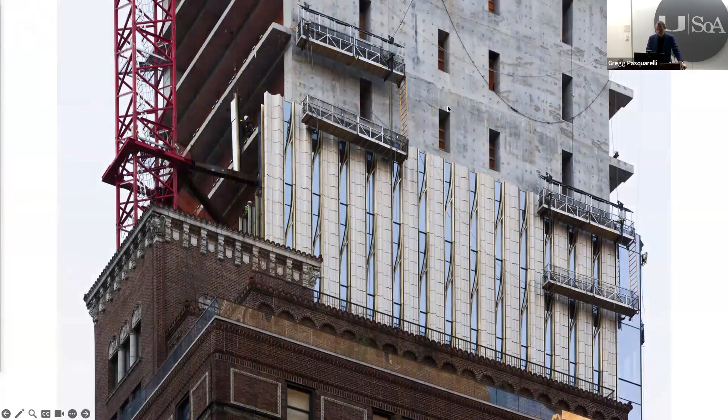And here you can see the mock-ups of the facade. And then the building under construction. You can see there are some punched windows and bathrooms and kitchens that go through it, but really it's a mega shear wall that's holding this building up on the east and west. And then it's super open on the north and south, where you have the view of Central Park or the view of Midtown Manhattan. So here you can see it under construction. You can see the terracotta as it goes in and out and the shadow patterns that get played on it.

And here you can see, so just so you know, this is the most slender building in the world. The slenderness ratio is width to height. So anything that's more than 1 to 10 is considered slender and is very complicated to build. Anything that's more than 1 to 15 is considered exotic and is incredibly difficult to build.

The most slender buildings in the world are in Hong Kong. Some of them are up to 1 to 16, 1 to 17. I think there's one that's 1 to 18. This building is 1 to 24. So it completely shattered every record, and working with WSP to develop the structural system was a remarkable feat and incredibly difficult.

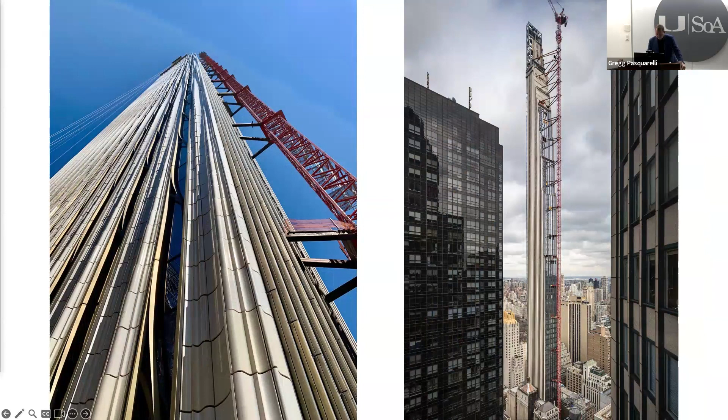But here you can see it under construction. The guy who had to walk out on that beam to get up to that crane had like the craziest job ever. But here you can see it next to the Plaza Hotel and Gordon Bunshaft's 9 West 57th Street on the left. And the texture as it goes up on the sides, and the building as it's finished. It's only 60 apartments in the whole building.

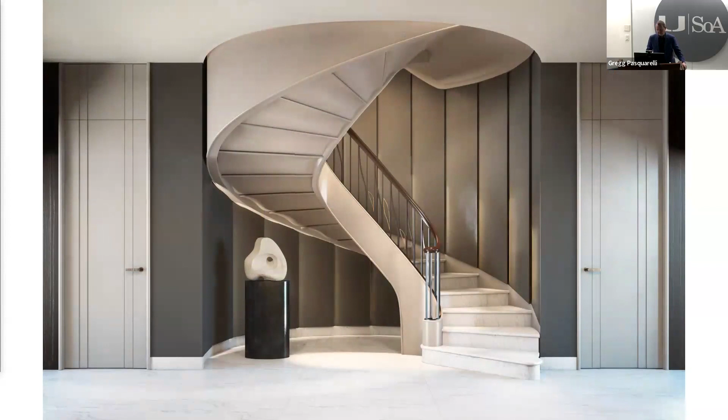Some of the apartments are duplexes. This is how they come. This is how they're finished. And some of them have double height rooms. There's only 7 of those. Interestingly, those are the ones that sold first. These are not affordable housing units. And then here you can see the building and how it looks today.

So in conclusion, I think it's been a hard 4 years dealing with everything going on in the world, and the things that we're dealing with, with construction, with financing, with politics, have made it harder and harder to execute. But it's when architects have to really work harder and put their heads down and know that they can build buildings of better quality, buildings that people love, buildings that people want to take care of, as we said.

Building density around mass transit, and then leaving nature alone, is really the best thing you can do. But if you build density and you build it of low quality and you don't make great spaces and you don't make equitable parks and schools and mass transit that connects it all, then it's a dystopian world.

So I think that as we urbanize more and more of the human population, it's more and more on architects to take on that role of making great cities and great places for people to live, where they have the greatest opportunities, because you have people crossing each other and learning from each other and inspiring each other, and to try and dedicate a life towards making those things happen, I think is a very special opportunity.